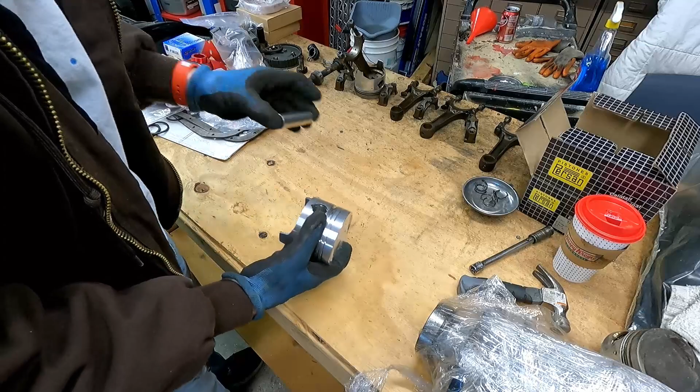So as part of this build, we have all new pistons that also come with brand new wrist pins. So these are all nice and ready to go, 20 thousandths over to match our bore. Now I've already taken off the old piston heads from 3 of the 4 cylinders, but I'm going to show you guys how to do that really quick.

There's a little clip, I guess you want to call it, a little C-clip that's in there. And you have to get that out. There's a little divot here. You just go in with a flathead screwdriver. I modified one that I have, got it ground down so it's nice, thin, and fits right in there. And you just pop it out. So let's get these out.

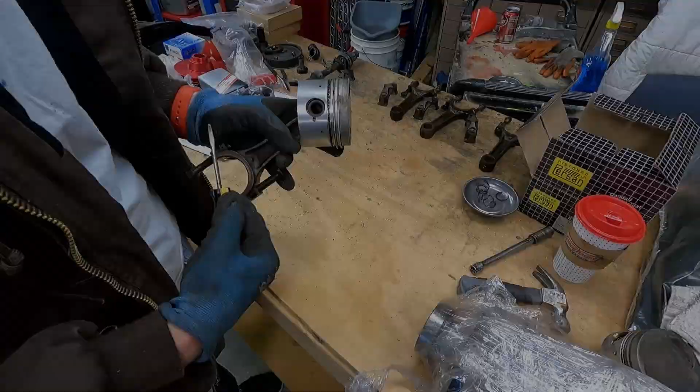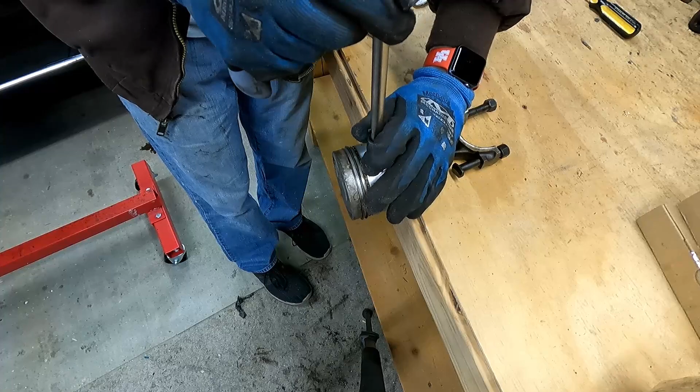With those C-clips out, we're going to take a 13mm deep socket and a 6-inch extension, and we're going to be able to drive out our wrist pin from our old piston. And with that wrist pin all the way out, we're able to fully remove our old piston head, and now we have just our connecting rod on the bottom.

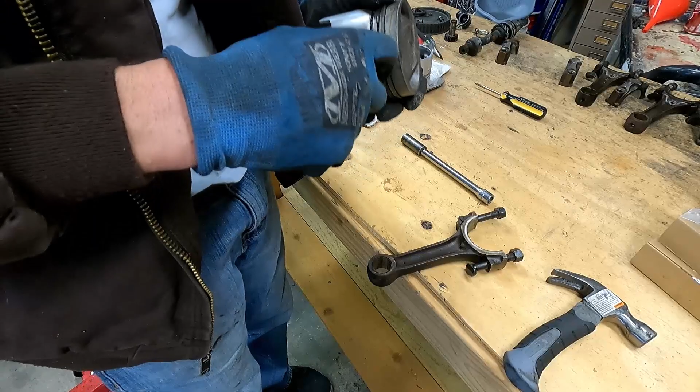We're going to grab our wrist pin off the ground and just kind of keep them together. We're not going to end up reusing these. We have our nice new set. So all we have to do is the reverse of this process to put our new pistons in.

But we're going to clean these up a little bit, and we're going to grab our assembly lube and really lubricate these, and then we are going to be able to reassemble them and put our C-clips back in the little groove that is in there. Hopefully you guys can see there's a thin groove that these ride in.

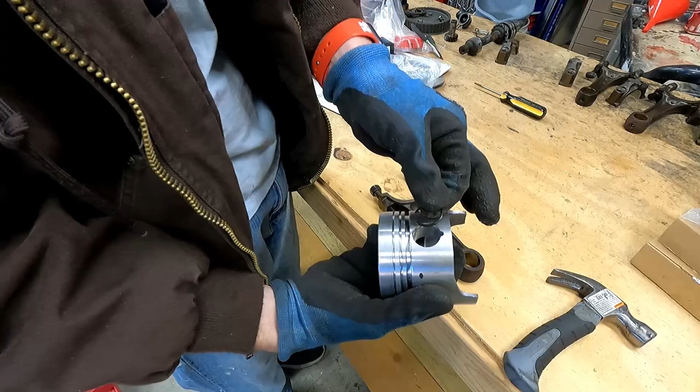You want to make sure the C is opposite of the divot. So when we put them in, the C needs to face the top, farthest away from the notch, just like that. So let's get these back assembled and we can start working on the block.

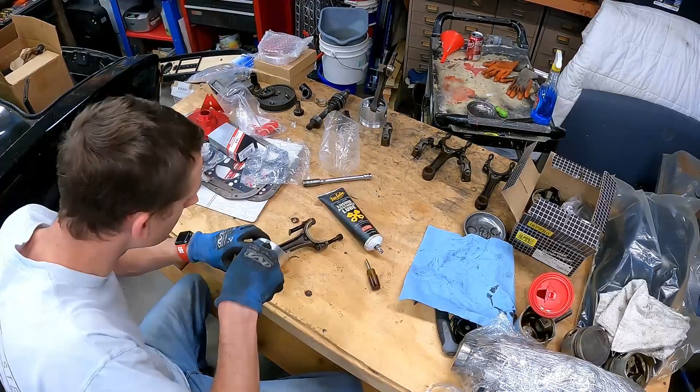So I wanted to show you guys really quick how I'm doing this while I'm on the last one here. On the C-clip, we're making sure our notch is down and that groove is visible, so the wrist pin isn't covering the groove. What I'm doing is taking a small flathead and pushing in the middle here of that clip, and it compresses it together, and it should start getting it in there.

And I work the sides with a flathead screwdriver or a really skinny one, and I push it down on both sides, and it slowly works its way into the slot. Sometimes it'll fight you. You've got to be careful because this spring will launch out on you if it's not in there correctly, so please make sure you're safe. That way you don't get one of these in your eye. That wouldn't feel very good at all.

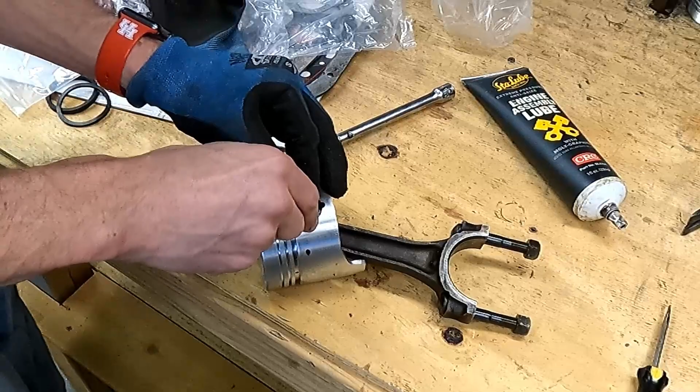So we're pressing it in the middle. And as we're pressing, we're going to be squeezing the top to help it seat in there, if I can get it to work with me, where you guys can see it. Alright, so as we get it into the groove, I'm pressing down to try and get it under the surface, and I start working both sides evenly, and slowly working it into the groove down in there. Of course my glove gets stuck like every time.

And all I'm doing is working it back and forth. Just like that. And it's in there. Nice and free. And just like that, all four are done.

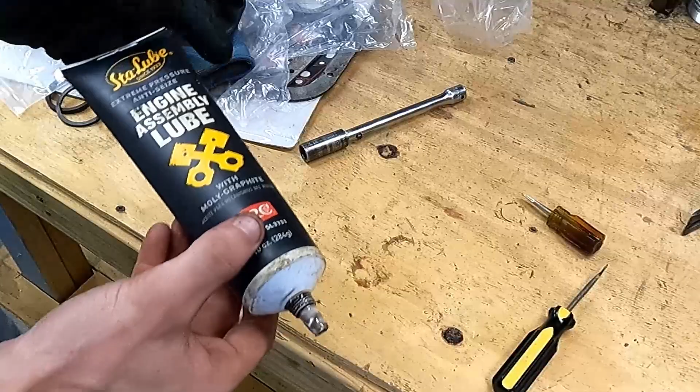I've been using this engine assembly lube on the wrist pins and in the connecting rods to make sure they're really well lubricated. This is really sticky, tacky stuff, and it's good for building engines, and it's got the high pressure rating, so it'll stay on there for a long time and is really good for our first startup. That way we don't burn through those brand new connecting rods and wrist pins.

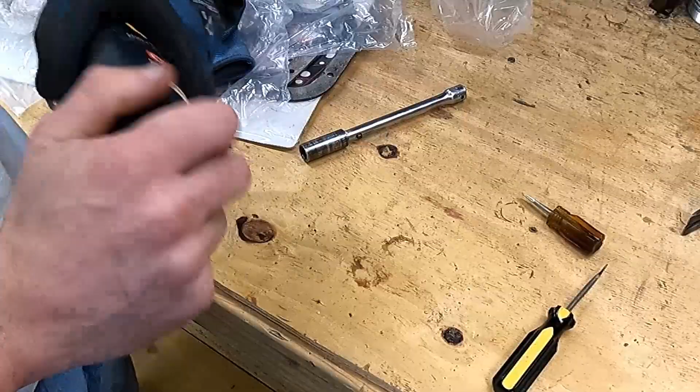So with our wrist pins and our new pistons on, looking pretty good. Of course, we'll do a quick clean on them before we set them in there, make sure all the debris is off there when we get to that stage. So now I think we're at the point where we can jump on the block.

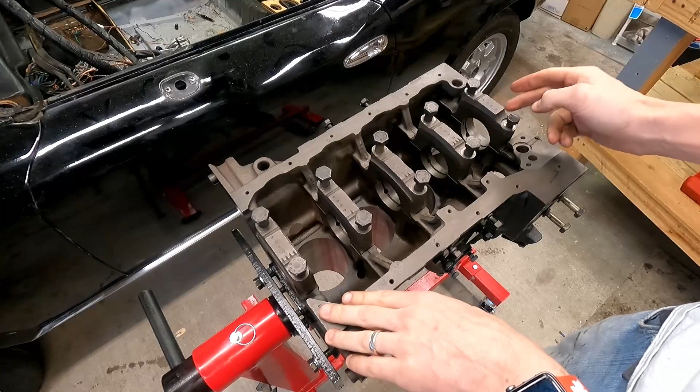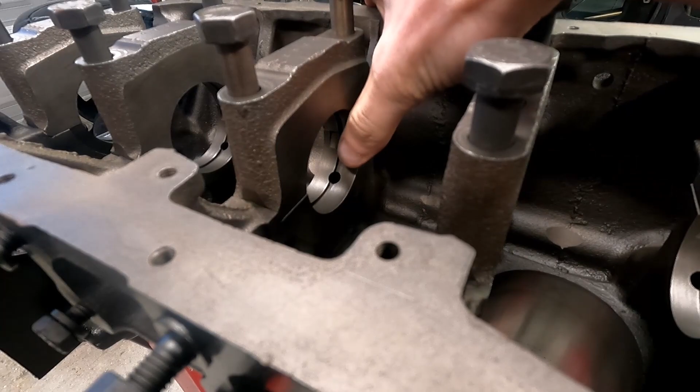Since we've got our engine flipped over now on our stand, we're going to remove all the bearing caps. If you notice, we've got the numbers all facing the back. So if you're looking at the back of the engine, you could read all the numbers. And another thing to look at, and I'm going to show you up close, is if you look in here, you'll see the tabs are opposite of each other. That means you know you have the exact correct orientation. So as we're working through this, just be mindful of that, where the tabs are opposite and all the numbers are facing the same direction.

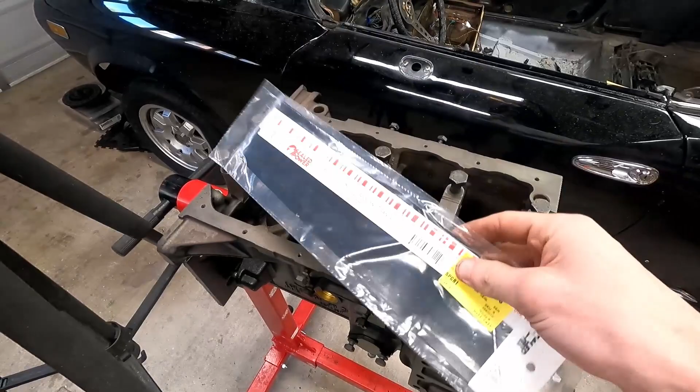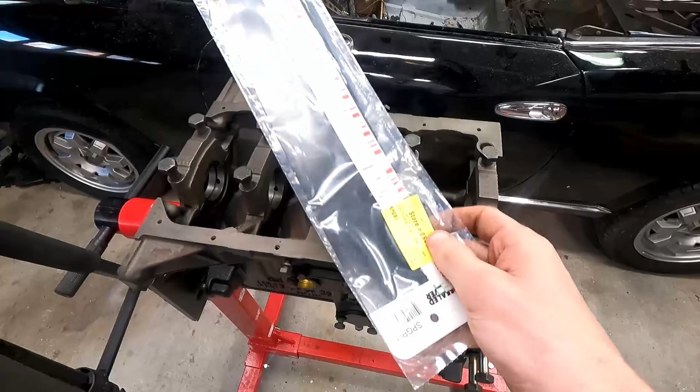So we're going to get these caps off, and we're going to start putting our bearings in, and then we're going to get our Plastigage, which is this right here. It's like $4 from the auto parts store. I went to Advance and picked that up, and then we can see our clearance between our bearings and our crankshaft. So let's get these caps off, let's get our bearings in, we'll rest our crank in there, we'll put in some of this Plastigage, and we'll see where we're at.

So we've got our bearings in. I want you to notice that our middle one is the solid. All the other ones have this center groove in them. And you'll notice that the tabs are lining up with the tabs in the actual block itself. The next thing we're going to grab is the crankshaft. We're going to rest it in there nice and straight as we can.

And as tempting as it's going to be, do not turn it. Okay, so this is going to be really tempting, but don't spin it. It's a really bad idea, because the torque isn't on there all the way down, holding it truly round. And so it may warp and make a soft spot or a worn out spot on the bearings. So do not turn it.

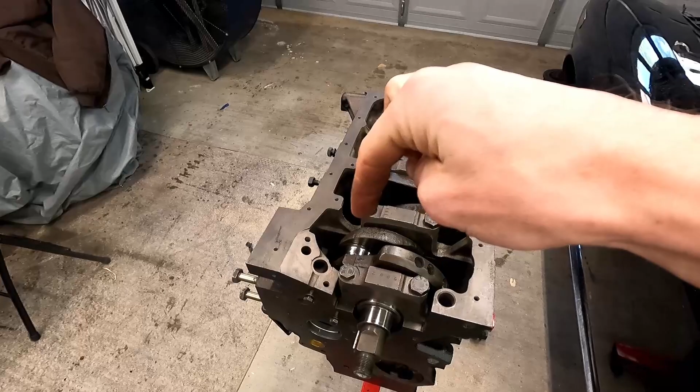So we've got our Plastigauge in there. You can see a little tab sticking out. We've also got one in the back. The manual only calls for the front, but I'm going to do the back also, just to make sure that we're even all the way across. So we're going to torque these in a crisscross pattern, starting from the middle and working our way out. And it's 83 foot-pounds on the 19mm bolts. We have one 17mm, and that one calls for 53 or 59, I believe.

59 foot-pounds on this one, and 83 on the rest. So let's get them torqued, and we'll find out what our Plastigauge tells us. As we begin to torque these, we're going to start them really small. We have these all just hand tight in here, and then we're going to progressively torque them in that star pattern. We're going to start at 20 and jump up to 40, 60, and then finally 83. And this one we end at 59.

So we're just going to continually do that pattern little by little, making sure it's nice and even as it sucks it all the way down into the block. Now we're going to bump it up to 40.

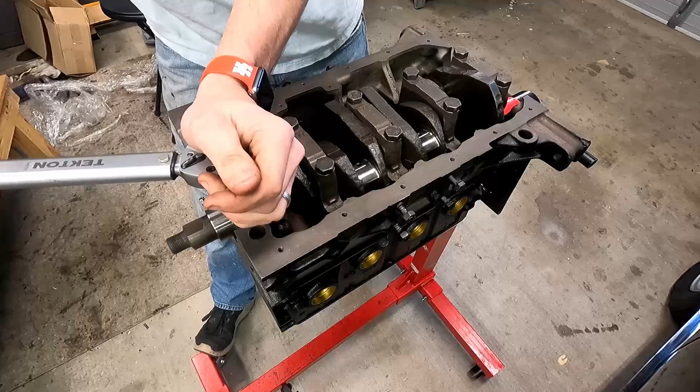Next we're going to go up to, you could do 60, but this one's 59, so we're going to go to 59 right there. That way we can do our final torque on that one when we get there. Alright, that's our final torque for that one.

And now we're going to bump it up to our final one, which is 83 for all of our 19mm bolts in the middle. Okay, so that's the final torque on all of those.

Now what we're going to do is take it all off. So we're going to zip all these back out. We want to be very careful not to turn the crankshaft, because if we turn the crankshaft, it'll skew our answer for our Plastigauge and it'll throw off our results. So we're going to be very careful when we go to pull the front and the back. That way we don't smudge it or smear it. So let's get these off and then we'll take a look.

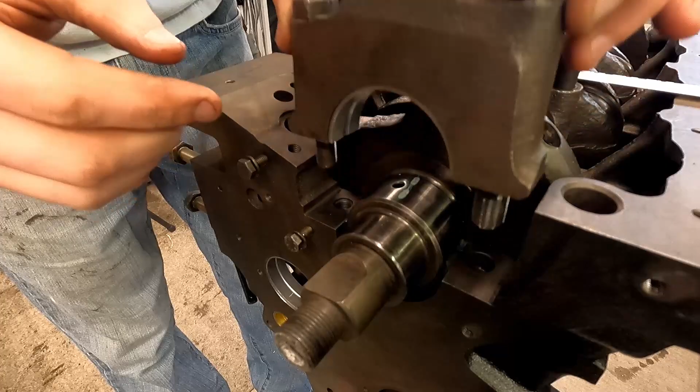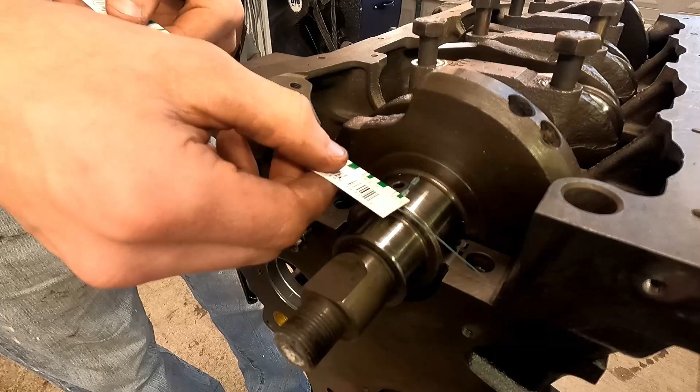So we're going to remove our end cap here. It's fully loose. We can see where it has crushed down, and we're going to take our gauge here, and we're looking at 0.002, let's see, 0.001, 0.0015. I think 0.0015 is right where we're at on the front.

And we can look on the back and see what we got there. About 0.0015 on the back also, and this is in inches. So let's take a look at our book and see if we're within spec. So here we are at the manual.

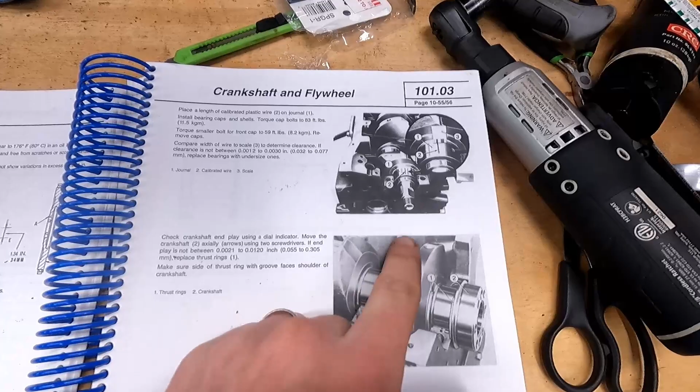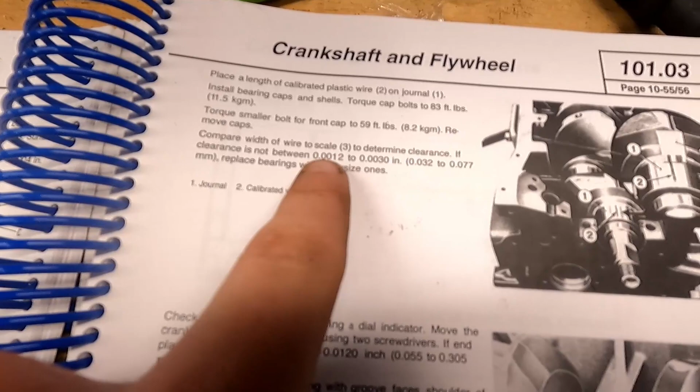We took it and put a slip on the crank snout here. And when we look here to our settings, we need to be between 0.0012 and 0.0030. So our 0.0015 is a little on the tighter side, but it is well within this number here. So that's good.

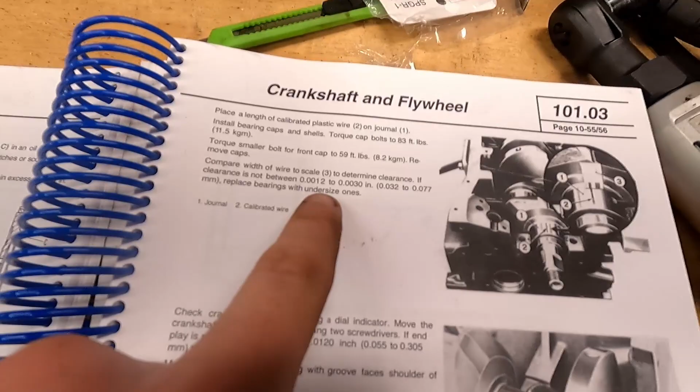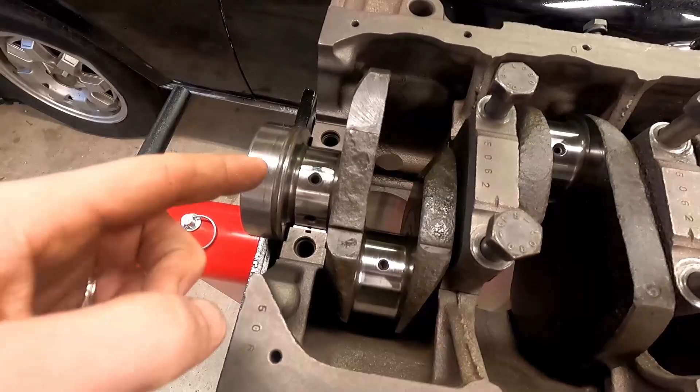We are within spec. So all we need to do now is come back over here and clean off this material very lightly. Nothing that's abrasive. Clean it off here and here. And that means that we can remove the crank, put some assembly lube on here, and keep going. This is great news, great progress, a great way to start.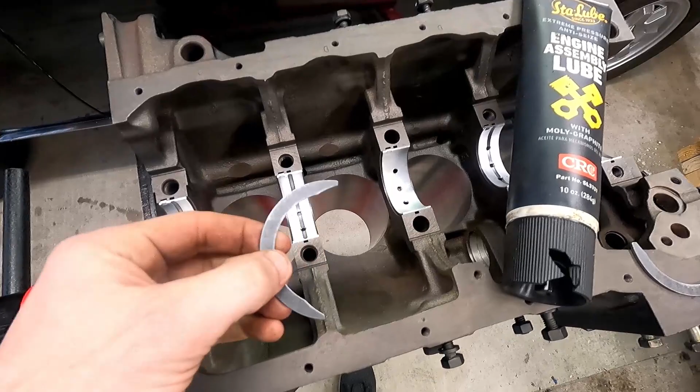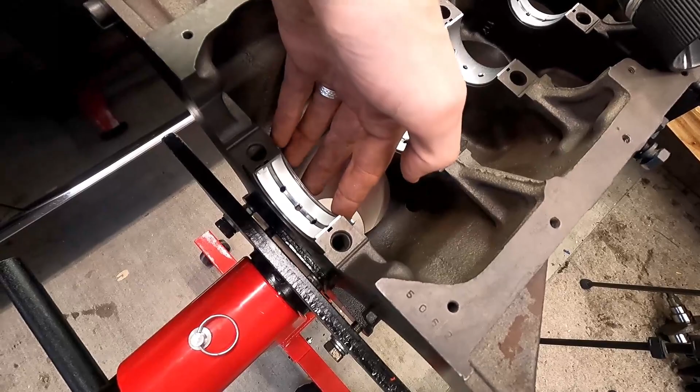Alright, so we're going to go back to our handy assembly lube. It's also time to add our thrust washers. These go on the backs. On the outside here goes one. And when you have the assembly lube on there, it helps. And the other one goes here on the inside on the rear. And that'll take up your end play gap. And we'll measure for that once we get that all assembled in there.

So we're just going to grease this up here. We're also going to do it on the cap side. Then we'll be able to torque down the crankshaft again, just like we did a second ago. And we'll be able to hopefully keep that in for good.

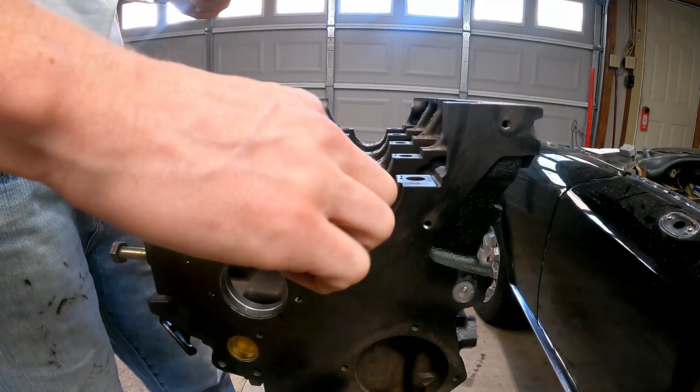So we are all torqued to 83 foot-pounds on our large 19mm bolts, and this one is 59. Now that it's all torqued, our thrust washers are in. It's really important to make sure that the grooves face out on those, away from the middle.

But now the ultimate test is going to be, can we turn this over by hand and it be really quiet? We don't want any scratching sounds. We want to make sure it's nice and quiet. The fan's going to kind of throw it off a little bit, but we should be able to turn this by hand. So here we go. Oh yeah. Super easy to turn by hand, which means that those are seated correctly, fully torqued. So now we can move on to the next thing.

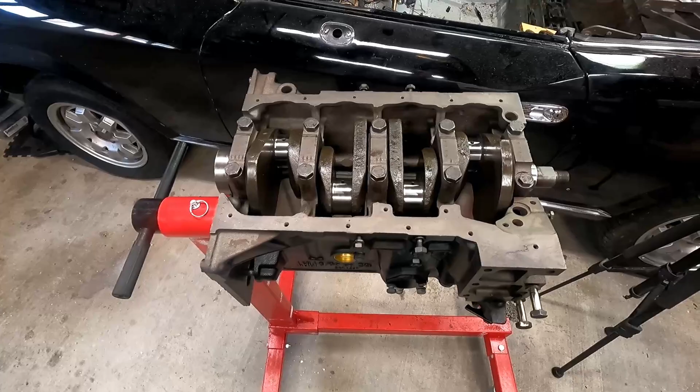So now that our crankshaft is installed, we're going to start moving back to our pistons. We have our brand new sets of rings. They come with the instructions and what goes where: 1, 2, and 3. There's even a nice picture on there of where they go. What we're going to do is we're going to take one of our rings and we're going to take it over to our bore on our cylinder.

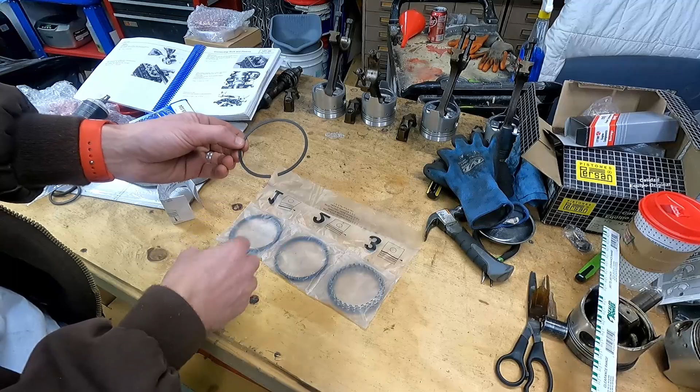We're going to slide it in there. I'm going to show you guys how to do that, and we're going to measure the gap before we do all the work of putting the rings on there, and then they're not going to work. So let's get over to the block and see what we measure out to. So what we're going to do is we're going to take our ring, we're going to place it in the cylinder.

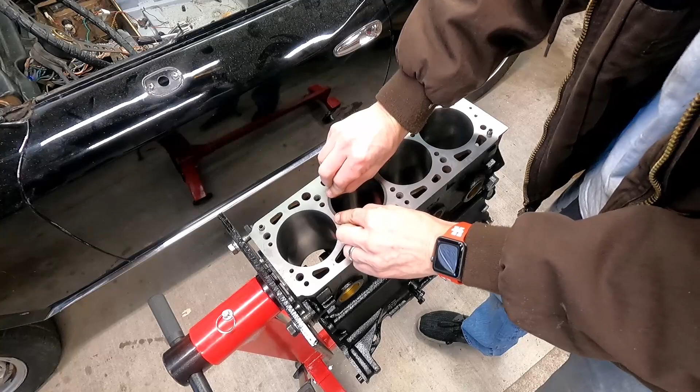Just inside like that. Now what I'm going to do is you take the piston upside down, and that way you get a nice even surface. And I go down to where the first gap is on there. I'm going to bring it out. I'm going to grab my feeler gauge, and that should give us a pretty accurate measurement of what our gap is going to be, so long as it's straight.

So we've got our ring. This is our top ring, and when I use the piston to push that down into the cylinder, this is the gap it creates. Now to be within spec is 0.30 millimeters. I don't know how well you're going to be able to read that. So we're going to try and fit this in that gap there, and it does. So we're within spec. It's a little tight, but we can get it in there just fine.

There's just a bit of drag. So that means we are well within spec on our rings on here. So that's a good sign that we're going in the right direction. So now we can start putting our rings on our pistons. So we're going to be installing our piston rings. We go from the bottom up. We're going to be starting with our lowest one first. It's going to be our oil ring.

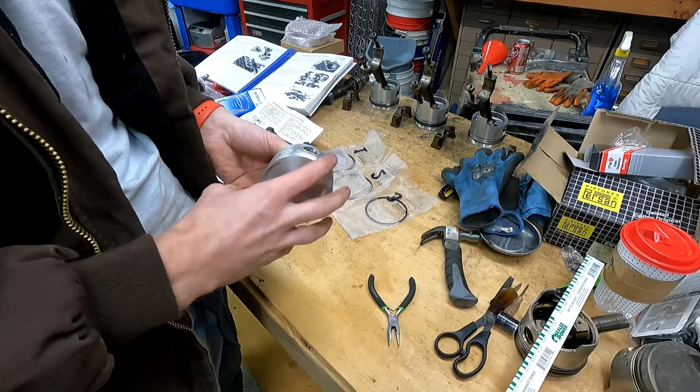You don't want to go from the bottom up because you run the risk of scratching the skirting, and that can cause damage to your cylinder walls. So make sure we're going from the top down. The two colors need to be visible. That's according to the manufacturer's specs. And these are supposed to be in opposite corners. One here, one here. So the first thing to do is to install the top one.

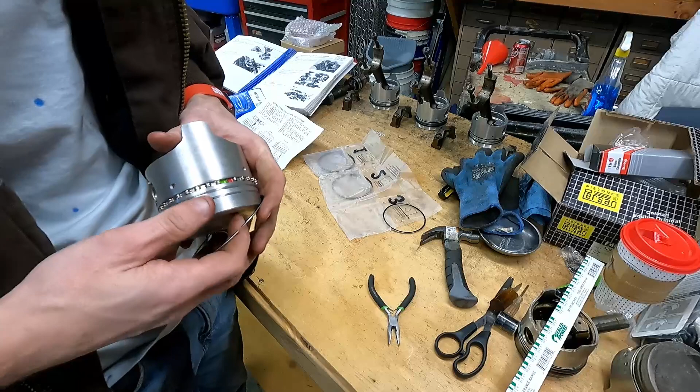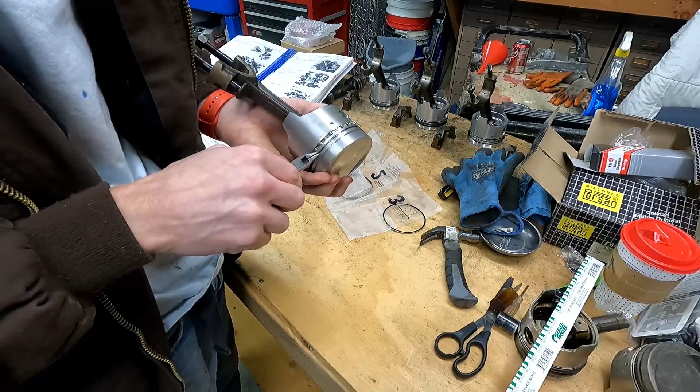Put it in the slot you're going to need it to, and I open up this side, and I carry it down. If you have a small set of needle nose, it really makes your job a lot easier as you walk it down into the slot. Okay, that's the top one. And now we're going to find the gap, which I didn't do correctly, of course.

Alright, so now we're going to install the bottom ring. I'm going to place that in that very bottom groove and work it around this way. And these small needle nose really make a difference, being able to control it with the tension that's on there. Okay, just like that. We'll move on to our second ring.

You want to note the orientation of the ring. This one says top. Sometimes they have a little dot or two dots to indicate what level it's on, but also which way it needs to go. So on this, we're going to be opposite direction of our oil rings. And we're going to go down to the second layer. Just like that. And we're going to go 120 degrees for our top one, again looking for the orientation.

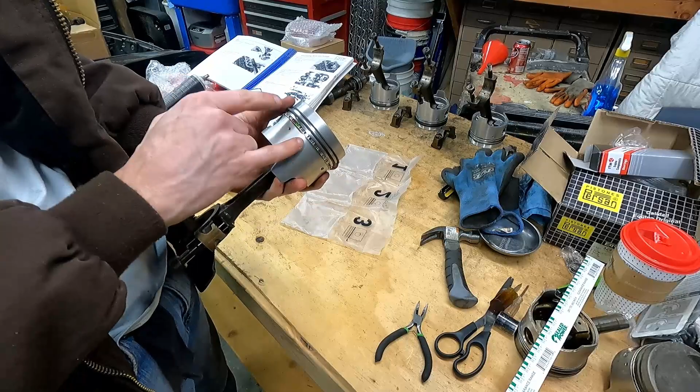Okay, that's all there is to it, to installing the rings. We just want to make sure the gaps are spaced evenly. These rings end up turning in the cylinder anyway, but to start it out, we want to make sure we don't have them all in a straight line because oil will get right by. So now our skirt is nice and clean, no damage done to it coming from the top like that.

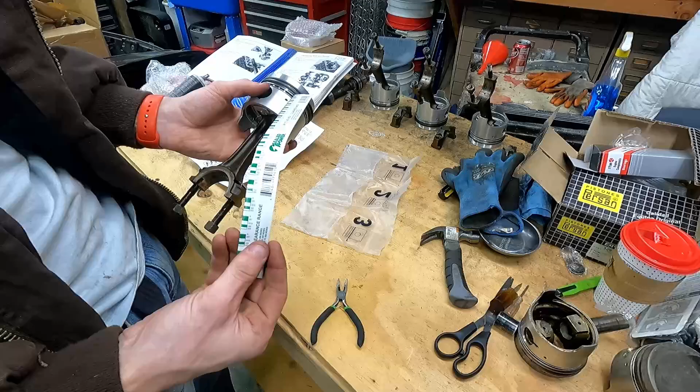And we're just going to double check our gaps. So I need to fix this one here. But we're going to double check our gaps, make sure we can see both colors. And all the other ones are done, which means that we can start putting these in the block, and we'll be able to take our Plastigauge right here and check for tolerance to make sure we're within spec, and then we can keep going from there.

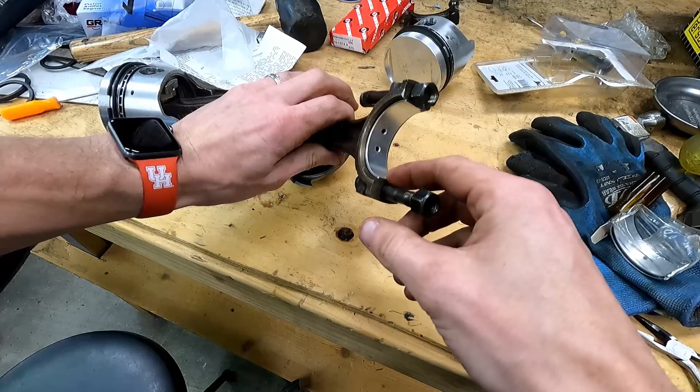As we're getting ready to install these, we want to make sure that we put our bearings in. It's just like the crankshaft. Insert them, make sure you have the notch lined up correctly on the connecting rod itself and on the cap on the bottom. Those notches are opposites of each other, and the numbers, these aren't the correct ones, but the numbers will line up on the side when we go to install them.

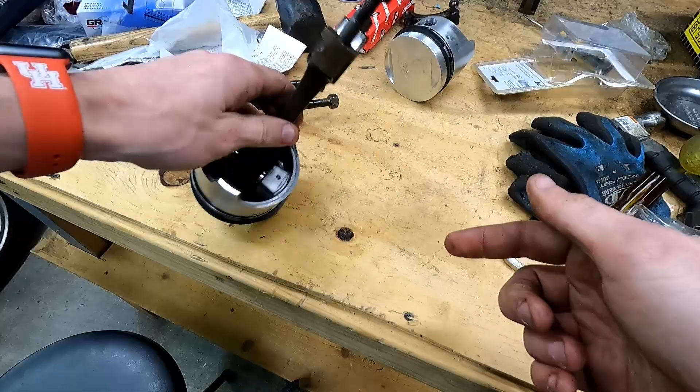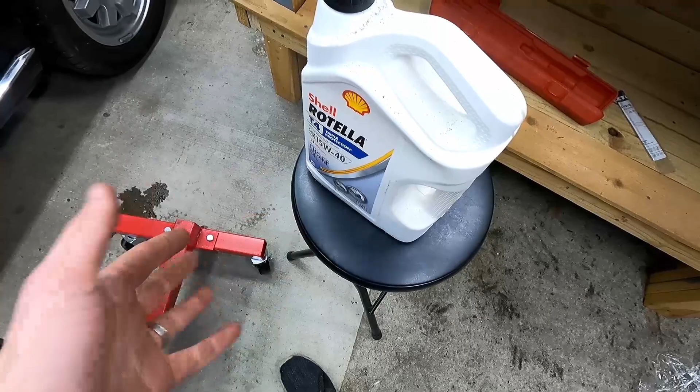So make sure you have those in, just like that. So as we go to insert our pistons into the cylinders, we're going to coat them with some Shell Rotella T4. It's got a zinc additive in it. It's meant for diesel engines, but it's got all the good stuff for flat tappet cams like ours. We're going to coat the cylinder walls in this just with our finger. That way there's something in there and it's not dry.

And I've also got the crankshaft journals on 4 and 1 all the way to the bottom, which means 2 and 3 are all the way at the top. So we're going to insert number 1 and number 4 first, because they'll be able to go all the way down. Then we'll flip it over once we get those in there, and we'll put our Plastigauge in there and do our tolerance specs.

So we're ready to install our number 1 piston. You can see here it's got the number 1 on it, and when we put our cap on, it'll also have a number 1, so we need to make sure those ones are lined up. Most importantly, we need to make sure that one is facing away from the auxiliary shaft. The auxiliary shaft is on this side of the engine. A really easy way to remember that is that the Fiat logo on the connecting rod itself faces forward.

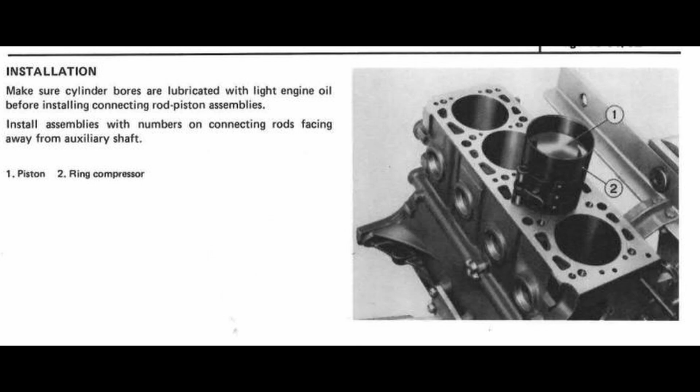So we're going to slowly take this in here. We don't want to scratch the walls. Okay, just like that, we made sure it's nice and seated. And I use a rubber mallet with a wooden handle, and I lightly tap it down as to not damage it. I want to make sure that the ring compressor is nice and flat to the top of the block here, and we're just going to tap it in. Okay, that's all there is to it for cylinder number 1.

Another easy way to remember is our intake is always larger than our exhaust. So that's why we've got the bigger cutout for our valve here. We wanted more fuel and air, and it's going to burn out and go out that smaller hole. So that's one done. We're going to do the same process all the way across, get them all connected.

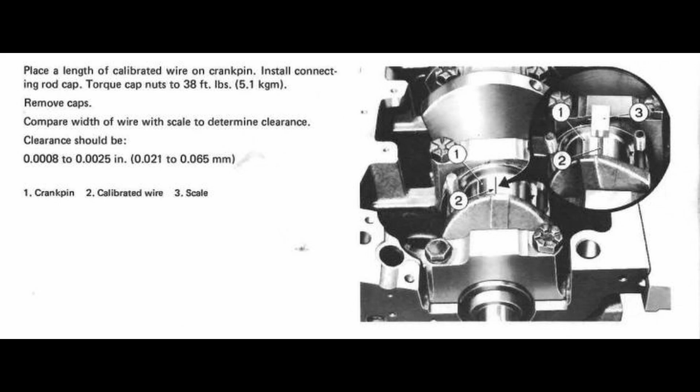So the next thing we're going to be installing is our oil pump. There is a gasket that goes on top when it mates to the body. It slides right in here. And we've got 2 long bolts that go through here. Start them by hand. And these get torqued to 14 foot-pounds.

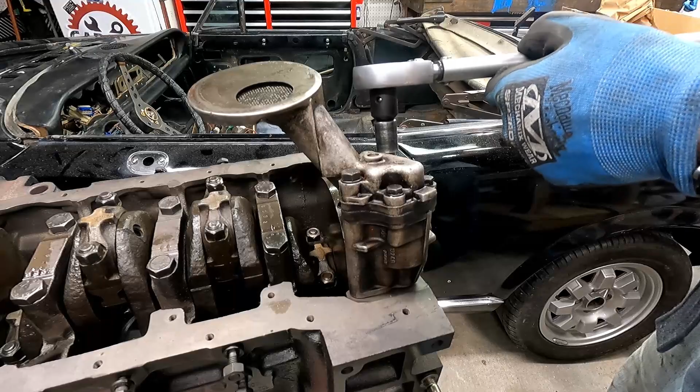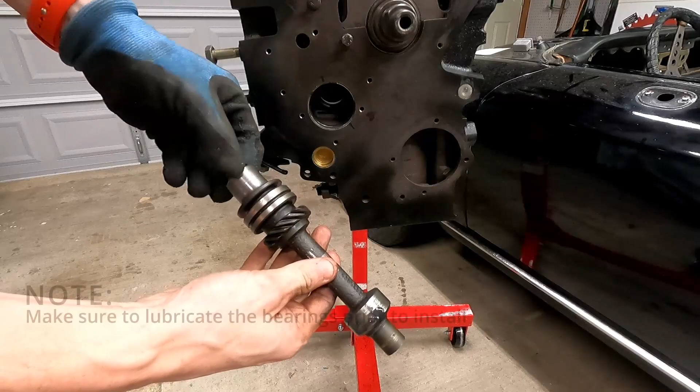So the next thing we're going to be installing is our auxiliary shaft. I have the bolt in it to help guide it in. There's a bearing here and there's another bearing on the inside. I had the machine shop press those in for me. They have the right tools to do that, and I don't here at the garage. And what we're going to do is slowly feed this in.

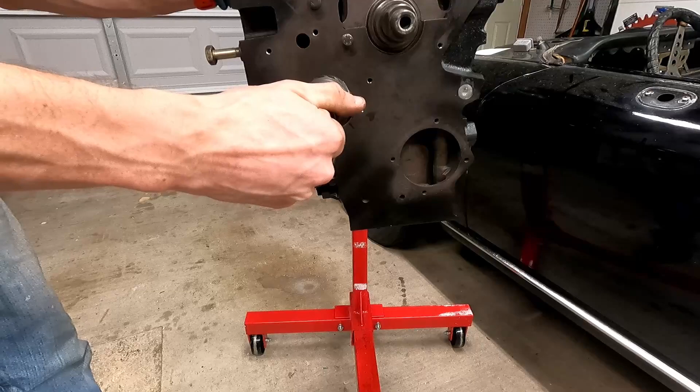The bolt on the front helps us have control over guiding it through. And we're going to make sure we don't scratch up the bearings as we go. And just like that, we are there. Okay, not too bad. We'll start installing the retaining clip that goes around it, which is right here. So this goes around it and holds that in place.

Helps if I put it on the right side, huh? I'm looking at it upside down. There we go. Okay, so that goes in there. It's got 2 10mm bolts. Always start everything by hand. That way we don't cross thread, because that would not be fun. Okay, just like that.

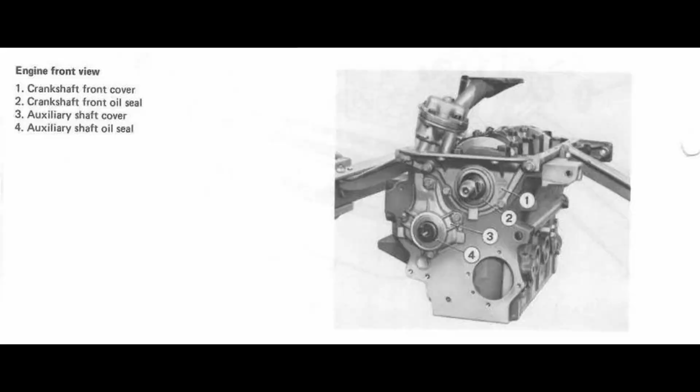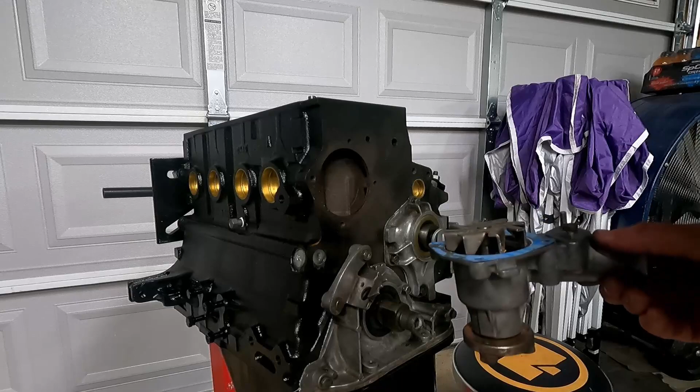Alright, so we're going to be installing our water pump. We've got our gasket on the back, and these are 10mm bolts. They're not anything crazy big, so no need to go crazy on the torque. If I can align it correctly, there we go. They're not going to require a lot of force, so we're just going to get them on there and make sure it's tight. Anywhere in the 10 to 12 foot-pound range will do the job for you.

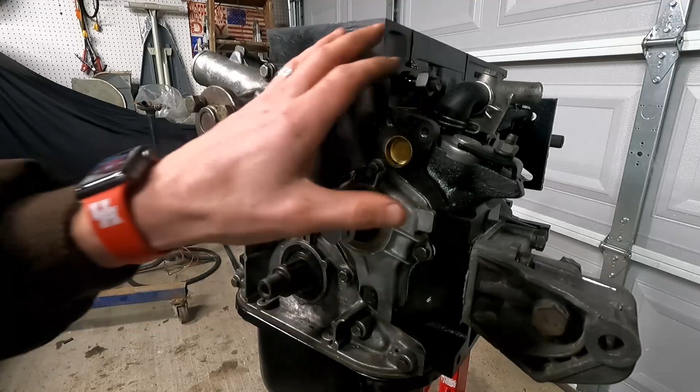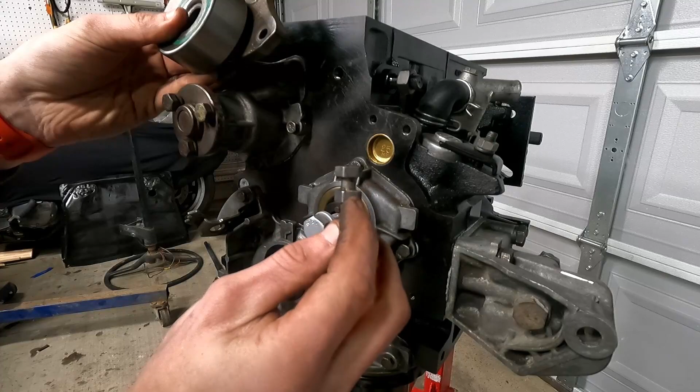So the next part we're going to be working on is going to be right here. This is where our tensioner pulley sits, roughly in this area. So the first thing we're going to want to do is install the lower bolt. If you'll notice, this one's got like two heads on it and a smooth part in the middle. That's where the bottom of the spring rests. We're going to install this one.

Now you notice I'm not running the tin that goes between the actual engine, the belt, and the outer cover. It's a real pain in the butt to get on and off when you have to service things, and a lot of people end up just leaving them off, and that's exactly what I'm going to do. I'm just not going to use it. It's a thin metal piece, and it's just a real pain, so we're not going to worry about that on this. I'm sure some other people have other opinions about that, but we're not using it on this one.

The next thing we're going to put in is our spring for our tensioner. It's got the spring, a shim or a bushing, and a washer and lock washer. And this tab is what rests in that gap, and this hook hooks on the top of our tensioner here. So we'll make sure we're facing the right direction and just tighten this in by hand. Alright, with that in there, our bolt on the bottom is still loose.

Now what you would normally do is have the head attached, run the belt, and then put this on last to pick up all the slack. But we don't have our head on yet, so we're going to be installing our bolt here in the middle. This is a really thick washer, and I'm going to do my best to center it on the middle of this bearing. That way we don't ruin the outer part of it. This is a brand new bearing, so it's nice and quiet, and gonna make all the difference.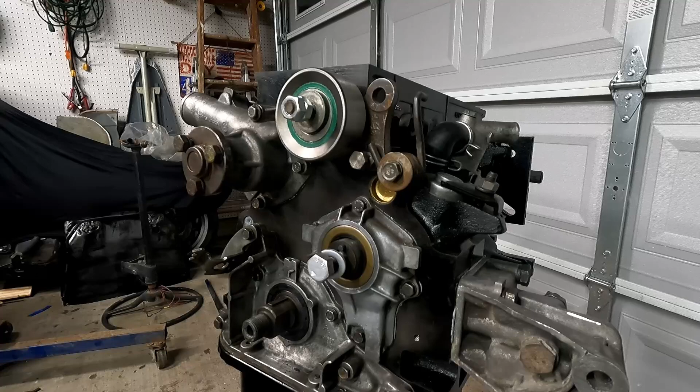All right, now normally you don't have the double nut on here because there's that metal piece that goes in between those, and those lock together, but we're just gonna leave it like that. It's not gonna hurt anything.

The next thing we're going to want to do is remove the bolt from our auxiliary shaft and place the pulley on there. It's got the locating pin just like that. Just loosely put it back in there. And this is timing up our auxiliary shaft. You'll see it's got a hole right here, and we will turn the auxiliary shaft to where that hole faces this bolt. Right about there. And we'll remove it. And that's how we know it's in time.

Just for visual sake, you guys can see how that lines up. We want this hole to point to the spring bolt on there. Like I said, we're not going to attach that quite yet. So let's move on to the next thing. We're going to do a quick check on everything, make sure everything is all tightened up, torqued up, and set, and verify that we're all in good shape.

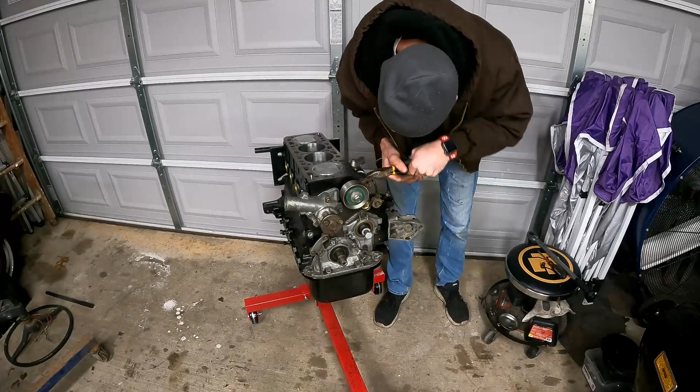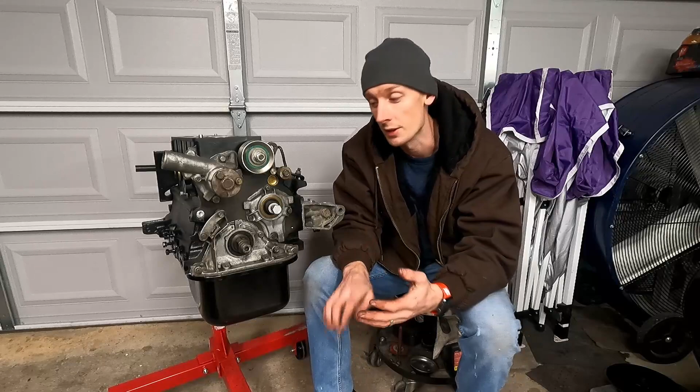Alright guys, that's going to be the end of this episode, the end of part 1 of our 2-part series as we build our 1982 Fiat 124's engine from the block up. We've got the entire bottom end taken care of, from the crankshaft to piston rings and the shafts installed, new tensioner bearing, the water pump installed, all new gaskets, nice and painted. Everything is installed. There's of course a couple pieces that we're missing, just because they're easier to install when the head is attached to the bottom end.